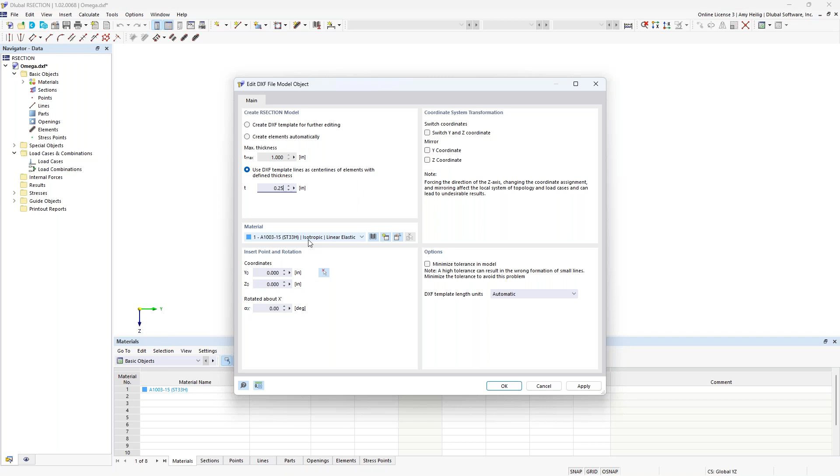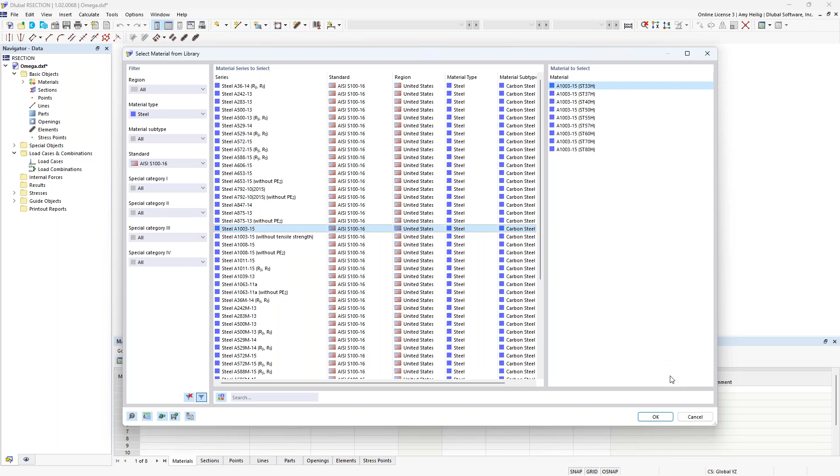We can visit our material library, and over on the left, we have the filters to utilize the steel dropdown and then the AISI S100. So here are all of the available materials for cold-formed steel. And notice that as we click through these different options, there are several subcategories as well. For this particular cross section, we'll go ahead and utilize the A1003-15 and the subcategory here of ST33H. So that material will then be set within this dropdown, and we can go ahead and click OK.

So once the import is done, we actually see everything automatically generated for this custom cross section. Now, I did want to point out that these are completely straight elements. We get a little bit better performance with the finite strip method with cold-formed steel sections when we just model these straight elements directly. It is possible to also model arcs at these corners where the elements join, but just know that the calculation time will be increased because of that. So ideally, it would be best to keep these as straight segments.

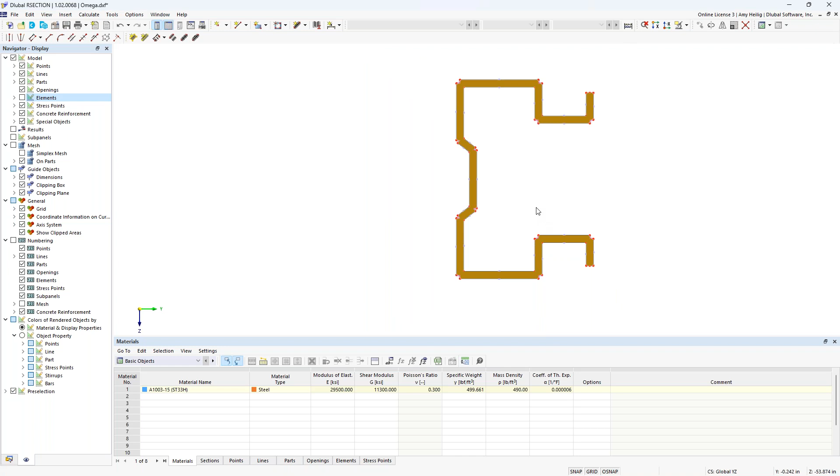Now, looking at the custom cross section here, we have a couple of elements that, again, were automatically generated. We'll start off with what we call the part. And the part is automatically created between the exterior boundary lines here of the cross section. Then on top of that, we have what we call the elements. And each one of these segments here is comprised of an element.

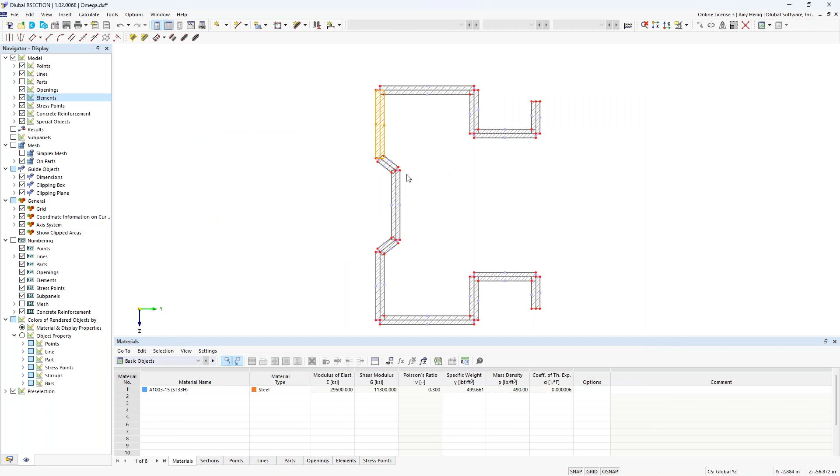We can right click to edit the element. And what you'll see here is that each of these has a particular thickness assigned to it as well as a length. And this information is important for the thin-walled analysis and is required. So we would need both the parts and the elements.

So going back to the navigator here, I'm going to right click on the model name to access the base data. There are two analysis methods. The finite element analysis is set here by default, but this would be more so used for massive cross sections. Instead, we want to modify this to a thin-walled analysis.

Additionally, under the manufacturing type, we can set this to cold form. This will just be helpful once we bring this cross-section into RFEM that this data will already be set. When we click OK, we can simply go to calculate, calculate all, and immediately we'll see here that the cross-section properties are presented to us in table format.

So we have the area, for example, the moment of inertia, the section modulus, and this is the information that needs to be transferred to RFEM in order to understand the cross-section properties here of this section. Additionally, you'll notice the unit stresses are given here based on a 1 kip applied load, for example, for axial forces or maybe a bending moment. We can also view those stresses with the 1 kip per foot applied to this cross-section.

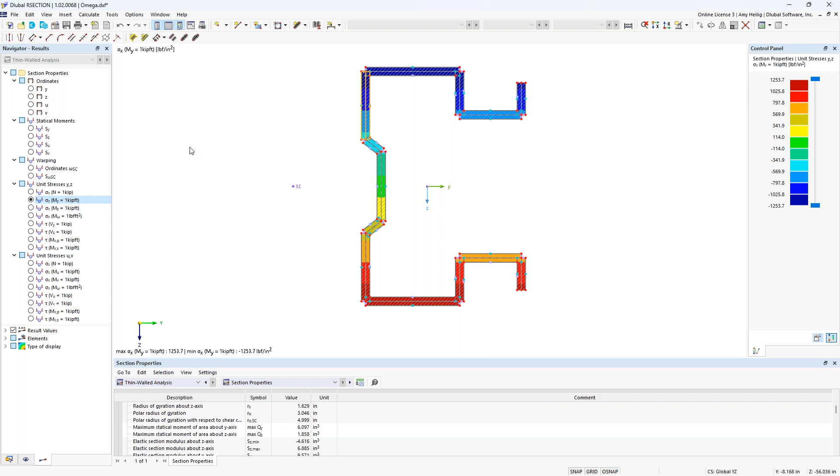So once we have the cross-section properties, we do want to save this to our computer. In order to integrate in RFEM, we do have to have these saved cross-section properties from the calculation as well. And we will jump over to RFEM. So beginning our cold form steel structure today, when we create a new model, we would give it a model name. The type of model would be set to 3D.

And under this second tab, this is where we have our optional add-ons. So RFEM is the base program, and it's responsible for the modeling, the loading. We can integrate with BIM software, and it can run the full static analysis. So this means deformations, internal forces, support reactions. But if we want to take this a step further to actually carry out the design according to the AISI or the CSA S136, then we need to activate here the steel design add-on.

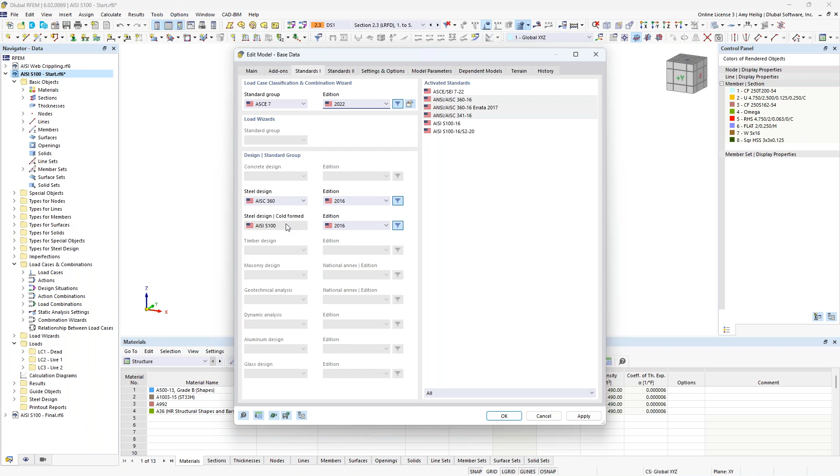Now, under this third tab, this is where we set our standards. So we can see that we will generate our load combinations automatically according to the ASCE 7. We also have here the NBC. We have implemented the latest standard according to the 2022 for those load combinations. Then because the steel design add-on is active, we see here the AISC 360 is set for hot rolled steel, and we have the AISI set for cold form. Now, alternatively, if we were doing design in Canada, we could set this to the CSA S16, and we'll see the cold form update here to the CSA S136.

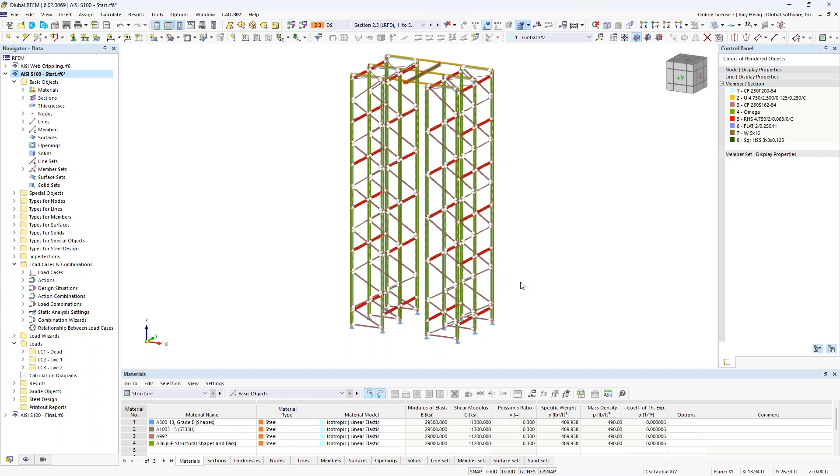So once this information is input, you can see here that for the sake of time, I have gone ahead and modeled our entire structure here. So this is some type of racking system maybe used for automatic storage and retrieval. Now we do have other webinars and tutorials that are dedicated to new users in the program where you can learn how to draw a beam, how to apply supports. So for the sake of time, again, we'll go ahead and just do a quick model review.

So over on the left in the navigator, we have here our various cross sections. So if I edit these cross sections so we can take a closer look, we'll see here the cold form steel sections applied to this particular model. So we have some channel sections, additional channel sections with stiffeners, and that custom cross section here was also brought in from RSECTION.

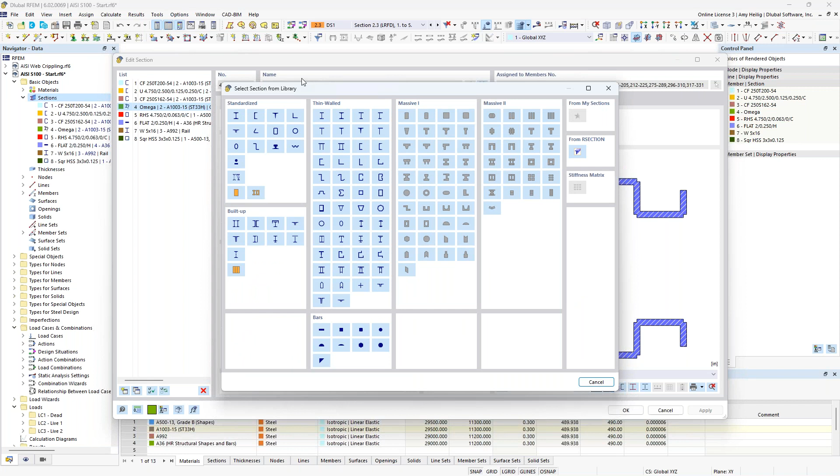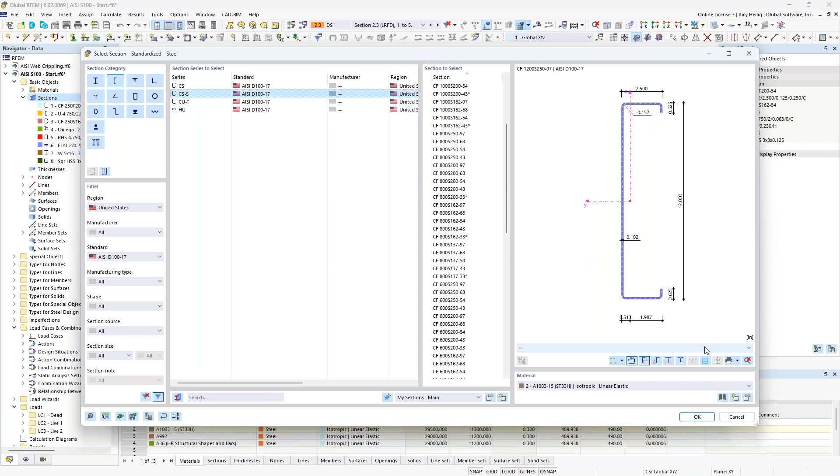When we look at our library database for our cross sections, if you want to choose a standardized section directly from the AISI, for example, if we take a look here at our channels, we'll utilize the filters once again on the left to filter to the United States, as well as the AISI D100, and we see the various channel cross sections, including hat cross sections, available to us here, again, directly from the AISI standard. Now, alternatively, if you have a parametric section that fits within the criteria listed here under thin-walled, you could simply input the dimensions and the custom cross-section properties will be automatically calculated in RFEM directly.

And then alternatively, we have the import here from RSECTION, and that's what we utilized for the shape here in the background. I just navigated, once I clicked this option, to that saved file from RSECTION on my computer, and we can bring this in like we would any other member. So in addition to these cross sections, I have also assigned a material. Similar to our section, we can always visit the material database. Over on the left, we filter to steel, to the AISI, and once again, we have access to all of these various materials directly from the standard.

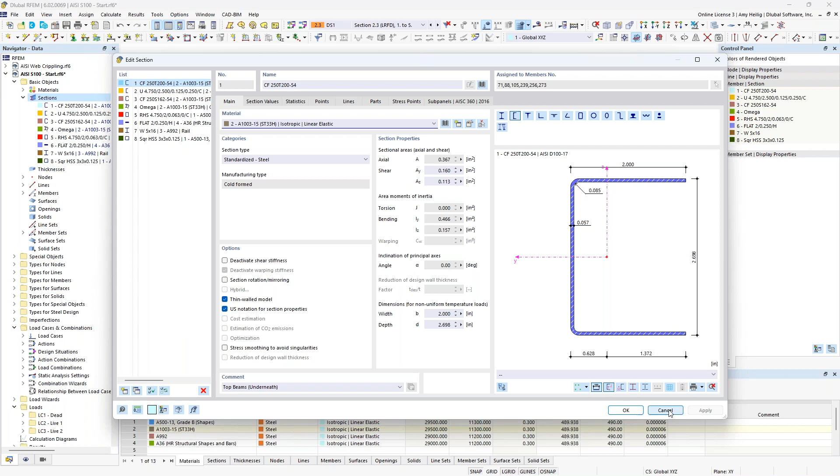So now that we have the cross sections and the materials covered here, we'll also see them within our navigator over on the left. When we take a look at that custom cross-section here for our column, and I'll zoom in, you'll notice that the program has actually rendered this true cross-section for me. And I'll go ahead and create a user-defined visibility here so we can see this in a bit more detail.

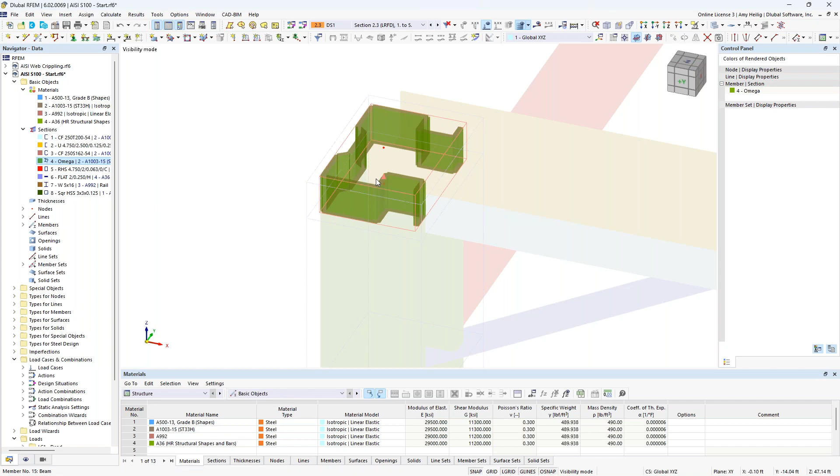So you'll also notice that for these columns, utilizing the custom cross-section, they were actually modeled in segments here. So each one of these is a separate segment. Now, there is possibility in the program to model this as one continuous column and just to keep this as one member and applying intermediate nodes along the length. But alternatively, if we do model this in separate segments, it's entirely possible to create what we call a member set. So we do this by selecting multiple segments.

We can right click, and under the members option, we have here what's called create member set. So that's what you'll notice here over in my navigator, that the program has grouped together these columns. And this will come into play a little bit later on with topics like notional loads, but also the design. Again, wanting to design this as one continuous member rather than those multiple segments.

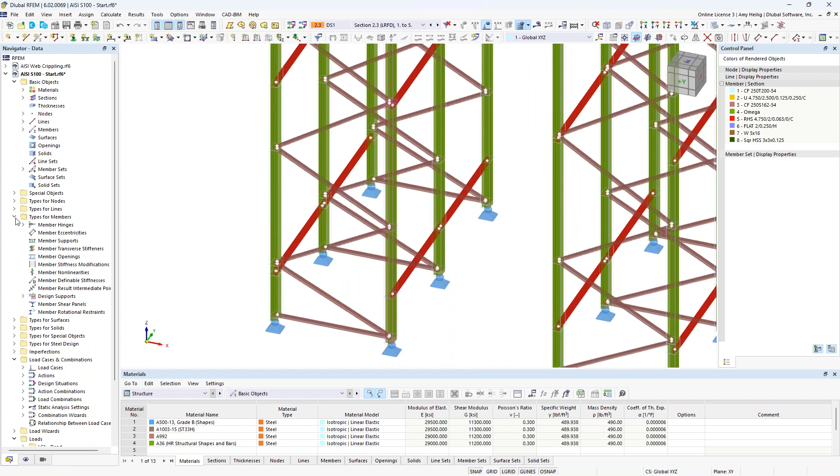You'll also see graphically the member hinges applied with the symbol shown at the member ends. So if we take a look at the types for members, we see here our various member hinges, and the member fixity all depends on how these cross sections or these members are connected to one another. So with cold formed steel, it's quite typical to connect them with screws. And I have several different definitions here, just depending on what that connection is.

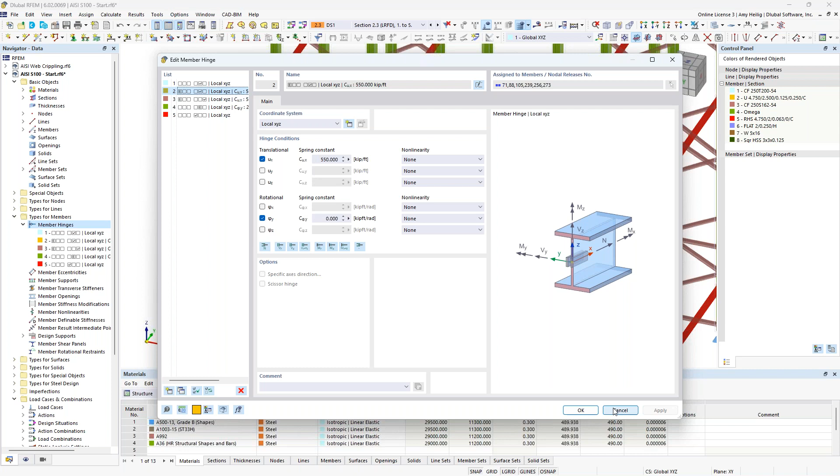So we have our 6 degrees of freedom. These are all based on the local axes of the member itself. You'll notice that for some of these, I've applied a spring constant. So something that's not fully fixed, not fully released, but somewhere in between. So within this model, we can take a look at the different hinges applied. They're probably a little difficult for you guys to see, but as I click through these, they are highlighted in the model depending on which member they are applied to.

And finally, we have our nodal supports down here at the bottom, which were applied just utilizing the tool up here in our toolbar. And these are also a bit special in the sense that initially they just look like standard pin connections, which you'll see under this definition type that we again have 6 degrees of freedom, but these are based on the global axes here, shown here in the background.

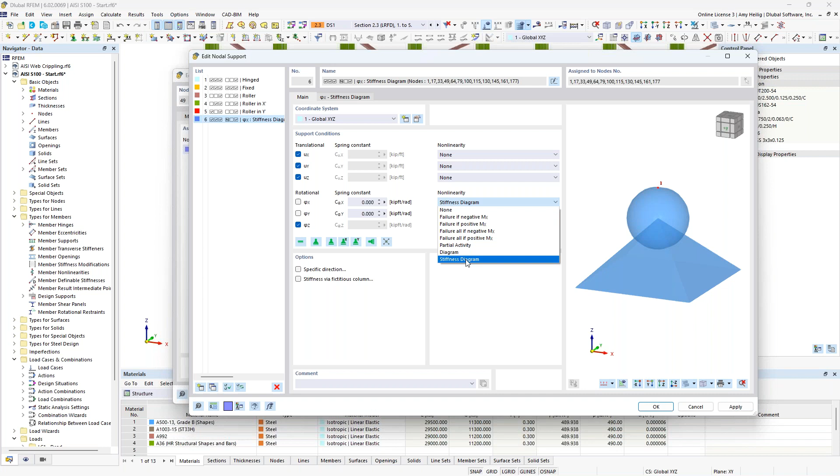So I've restrained the translation for this pin support, including the rotation about the global z-axis, but I've also applied a rotational nonlinearity. So this is within the rotation about the global x-axis, and under the nonlinearity options, I've applied a stiffness diagram. And we now get a new tab here where we can define this information. So you'll notice that I've set this so that the rotational stiffness is dependent on the contact pressure or the downward force for these nodal supports.

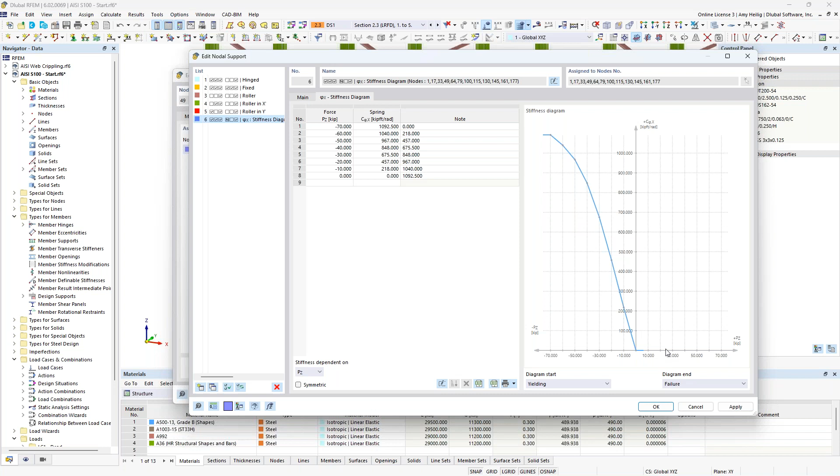So as the contact force increases here, we'll see a greater spring constant, and then in uplift, we'll see that support fully fail for rotation about the global x-axis. So it's entirely possible here to consider more complex scenarios for our nodal supports as well. So now that we have a basic understanding of the various members within the model as well as our supports, let us move on to loading.

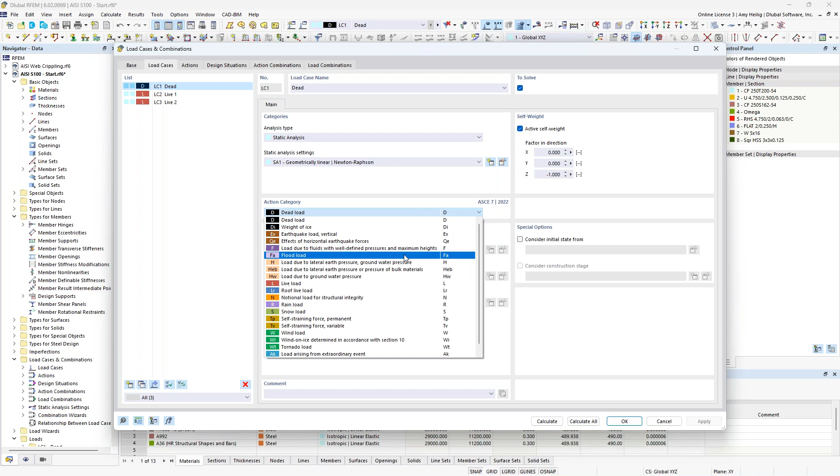So I have here 3 simple load cases that we can access in our load cases and combinations dialog box. So we have the first load case, which is dead load, and you'll notice that self weight is active here, and the action category is also set, which is just dependent on the ASCE 7, because remember back in the base data, this is the standard we're using to generate our load combinations. We can revisit that information here under our base tab, where we'll see the availability to change that standard if we'd like.

The second load case is a live load. So action category set to live, self weight is turned off here. And finally, another simple load case, live load 2 with the action category set to live. So once these load cases are set up, we would need to actually apply the loads to the structure. So we'll begin here with the display of our dead load. So you'll see that I actually didn't apply any additional loads to this load case. We're only accounting for self-weight automatically under the hood for that particular load case.

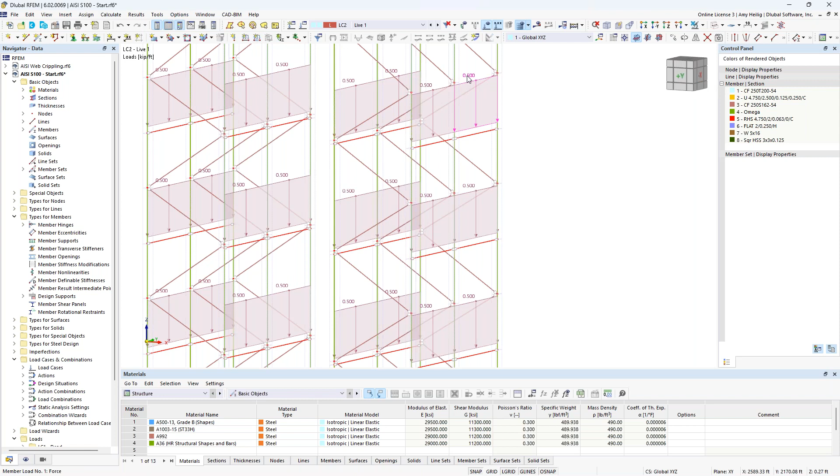Now looking at our live load 1, we see here, and I'll turn this into wireframe view, that we have the member load applied here at our beams, which are spanning between the columns. And a member load can be applied up here in the toolbar. But there is something a bit special about this particular member load. If I double click on it here, we'll see that it's just a standard downward uniform load of -0.5 kips per foot, but we have the ability to consider an eccentricity on the loading.

So when I turn this checkbox on, I get the additional tab up here at the top. Now the default behavior for a load is typically applied at the center of gravity or possibly the shear center. But alternatively, we can move that load application up here to the top center point so that perhaps we want to account for some additional torsion within the member for the design, or we can do so directly within the force eccentricity.

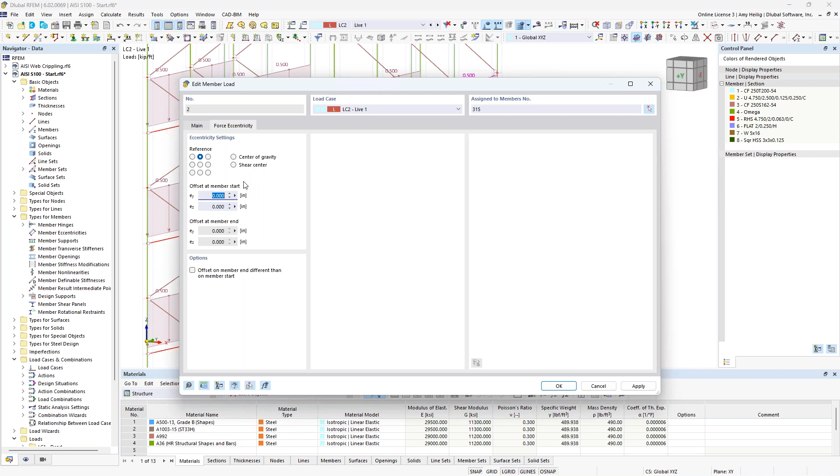So in addition to this first live load, we also have this second live load, and this is also a very simple application with a single nodal load applied up here to our center beam. So this load is just essentially introducing those horizontal forces to the entire racking structure. That nodal load can also be applied up here in our toolbar.

So going back to our load cases and combinations, now that we've generated those load cases, let's take a look at the design situations. So the program has automatically created 2 design situations for us, our LRFD design situation and ASD design situation. Again, these come directly from the ASCE 7, and it's nothing more than just grouping together our factored load combinations for the first design situation and our unfactored load combinations for the second design situation.

We can always click on this little info button here, which will pull that information directly from the standard of what we're referencing. Design situations are absolutely needed when it comes to carrying out the design within the steel design add-on that we activated. So that's why you'll notice that these are by default checked on here for that particular add-on.

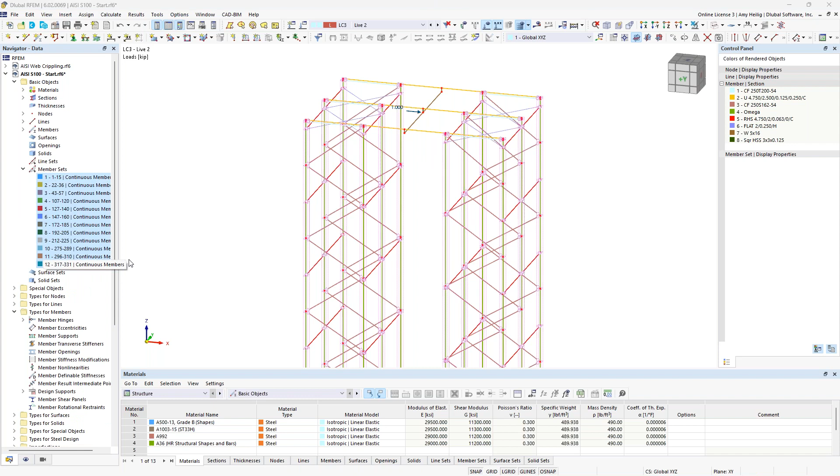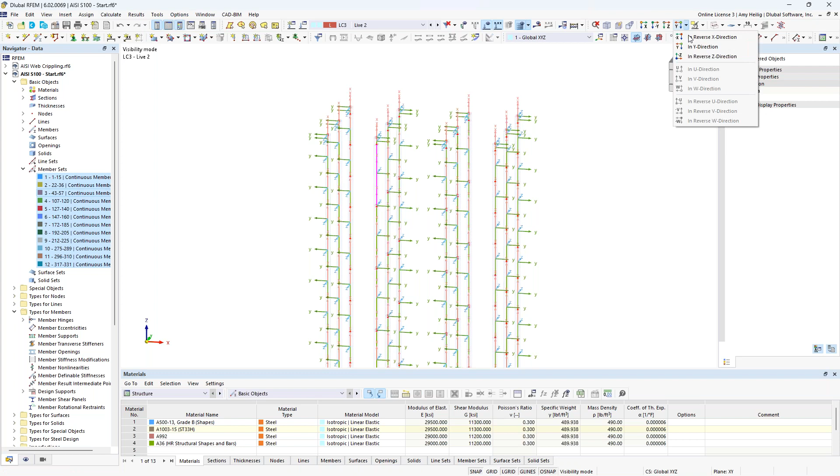So I'll begin by creating a user-defined view here for only my member sets. So we'll go up here to our toolbar and create that user-defined view. I'll go ahead and turn off the hidden objects in the background. Now, additionally, when we create our imperfections or our notional loads, these do depend on the local axis system. So if I right click, I can turn on the local axis system of all of these columns. So we'll take a look at the elevation view here.

Now, the imperfections are going to be available under our navigator here under the imperfections table. So we right click to create a new imperfection case. Now, again, the imperfection directions or the case all depends on which direction you want to apply them in your model.

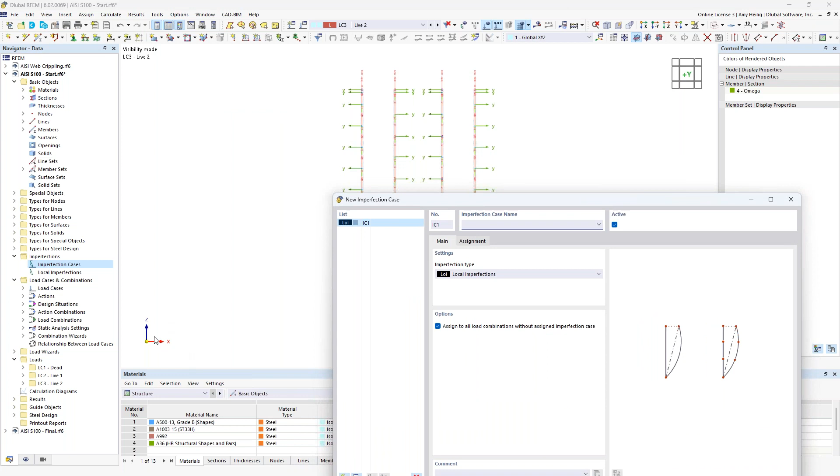For our case today, I'm going to create two simple imperfection cases, one in the global positive X direction and one in the global positive Y direction, or into the page here. Therefore, I need two imperfection cases. So we'll begin with imperfection in the X, and then I simply make a copy of this and I'll create my second case, imperfection in the Y.

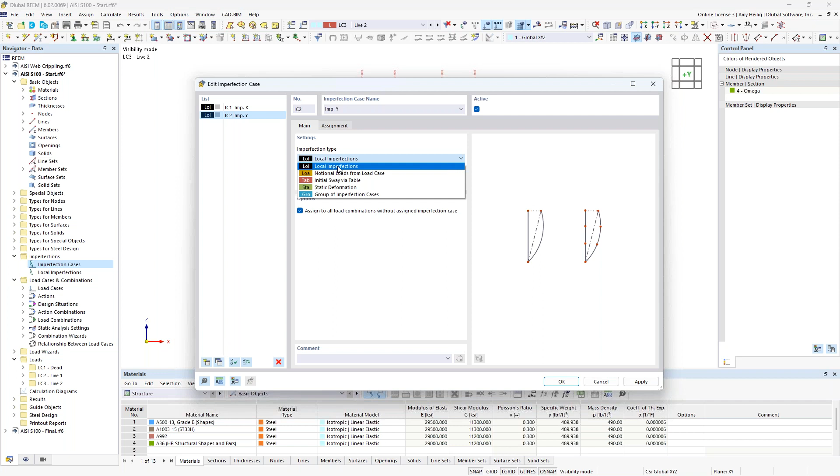Now, the imperfection type within this dropdown will be set to local imperfection. And under the assignment tab, there is the ability to assign specific imperfections or notional loads to specific load cases. Alternatively, though, we can just apply it to all of our load combinations, which is what we'll be doing today. So now that these imperfection cases are generated, we need to actually apply the notional loads to the structure. So now you'll see here under our imperfections folder these two imperfection cases.

So more or less, we are just applying a deflection here at the top of our columns, but the deflection magnitude all depends on the axial force applied to the member. So this is an iterative calculation that the program will automatically apply for us based on the axial forces under each load combination. The imperfection is applied according to the member's local axes.

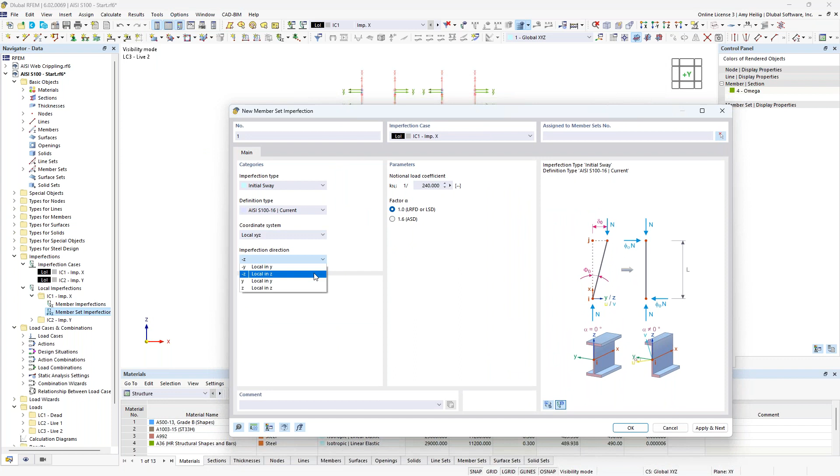So for our case today, this first imperfection in the X direction, we want to apply this based on the negative Y axes. And I'm going to select here my member sets in the first row and the third row. And we might be wondering, why are the local axes different here for the different member sets? That's because in rows 1 and 3, I have the members rotated at 90 degrees, and at rows 2 and 4, they're rotated at negative 90 degrees. So inevitably, this affects our local axes orientation, which is why we need to take a two-step approach here for the imperfection direction.

So now that I've applied it to those particular member sets, I can click Apply and Next to remain within this dialog box and simply modify my imperfection direction to the positive Y local axes. I'll select these graphically as rows 2 and 4. I click OK, and I click OK once again. Now, if we display our notional loads, or imperfections, we see that column out of plumbness applied, again referencing the AISI, to our member sets or our columns directly.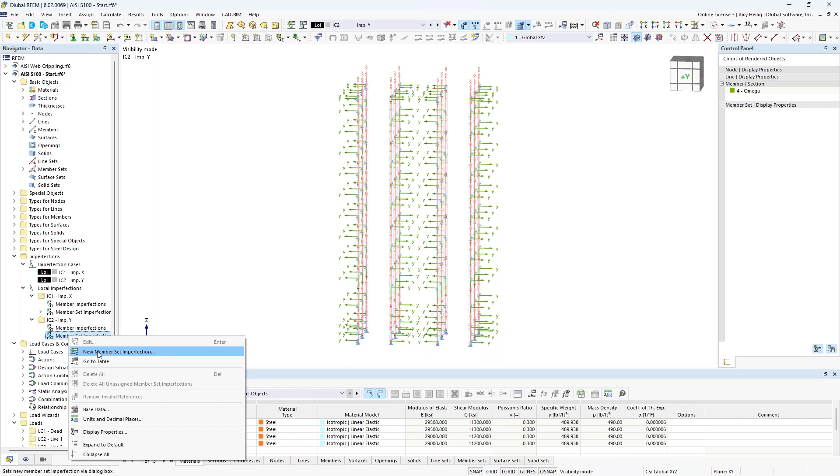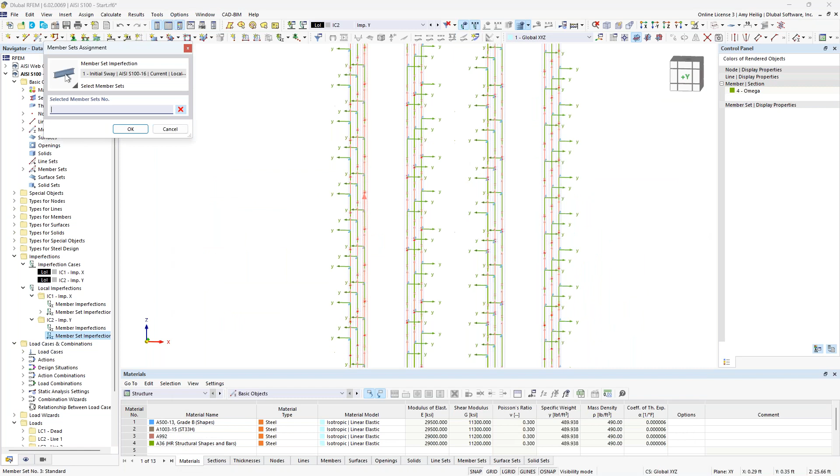We're going to do the exact same approach for our members for imperfections in the Y direction. So we go back to our navigator to right click to create a new member set imperfection, this time under the imperfection Y case. We'll select the definition type directly as the AISI S100 once again. The imperfection direction this time is going to be in the negative z-axis, and I will zoom in here to select the member sets in the first row and the third row. I click OK, apply and next, and then we simply modify this to the positive local z-axis to select our member sets in rows 2 and 4.

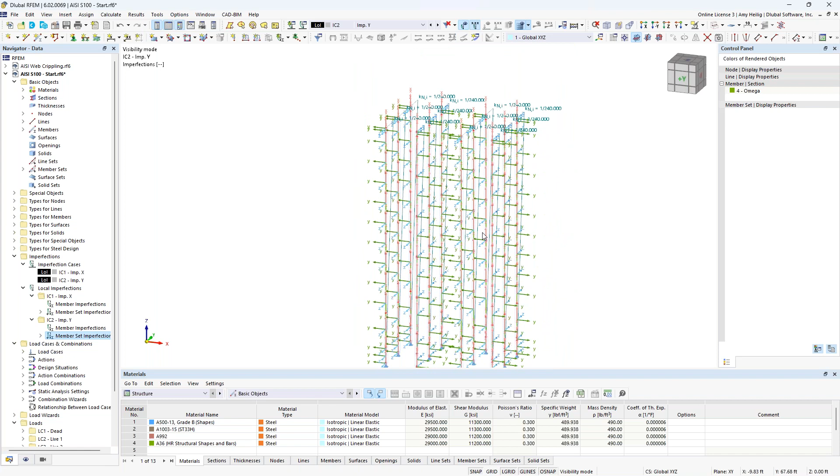I click OK through these dialog boxes, and now we should see this column out of plumbness, and I'll right click here to turn off the local axis system, applied in the global Y direction. So this is how we can directly account for those imperfections based on the code requirements. Now that we have applied the imperfections in these various cases, we need to combine them into the actual load combinations.

So I'll drop down here to my dead load, and this will allow me to access the load cases and combinations dialog box. And under the design situation where we had previously set the second order analysis, you'll notice that we have a checkbox to consider the imperfection cases that is automatically turned on by default. So therefore, for my factored load combinations, those imperfections will automatically be added in to the existing load cases as well. Now, the problem is that I want to carry out LRFD design today for my cold formed steel structure, but I'm using my ASD design situation for maybe my serviceability or deflection checks.

Therefore, I don't want to consider my imperfections for this second design situation. Well, it's easy enough to create a copy of this existing definition type. And within this copy, I just simply turn off the imperfection cases. So now going back into my main dialog box for my factored load combinations, we'll keep this as definition number 1. But for my unfactored load combinations, we're going to drop down and select the third option here where we

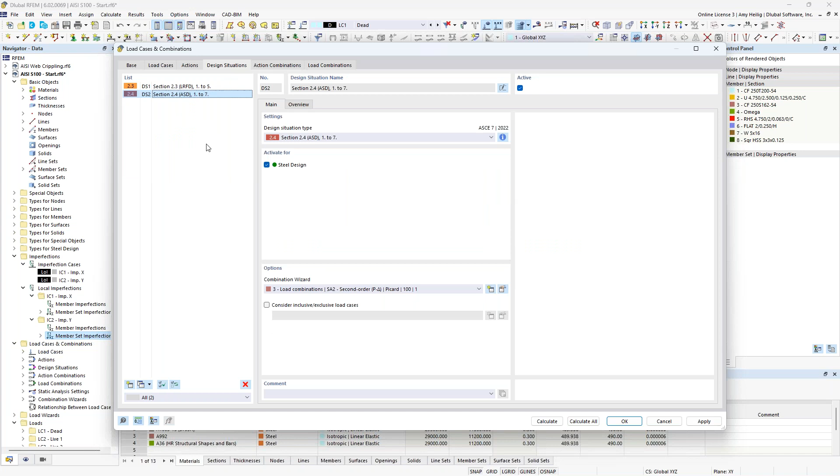The final topic, according to the direct analysis method, is stiffness reduction, and this is given in section C1.1.1.3. We reduce this stiffness to account for inelasticity effects as well as cross-section deformations. So in order to take into consideration the stiffness reduction, we are once again going to go in here to our combination wizard settings. And this option is actually controlled directly here with a new structure modification.

So we create a new definition type, and we're going to be applying this to our members. When we turn this on, we get an additional tab here, where under the member modification, we can use our dropdown to create a new member stiffness modification. Now, very similar to what we saw with our imperfections or our notional loads, we also have the AISI S100 available in this dropdown. So this will reference the code directly and the particular equations given here to iteratively calculate this tau sub B factor that will be applied to the flexural stiffness for each member.

And again, this is very similar to what we see within the AISC. Now we also have an additional factor here of 0.9 that's applied to both the flexural and the axial stiffness. Now the difference here from the AISC is that within the AISI, this is 0.9, but within the hot rolled steel standard, this is 0.8. So that is one difference that you'll see here.

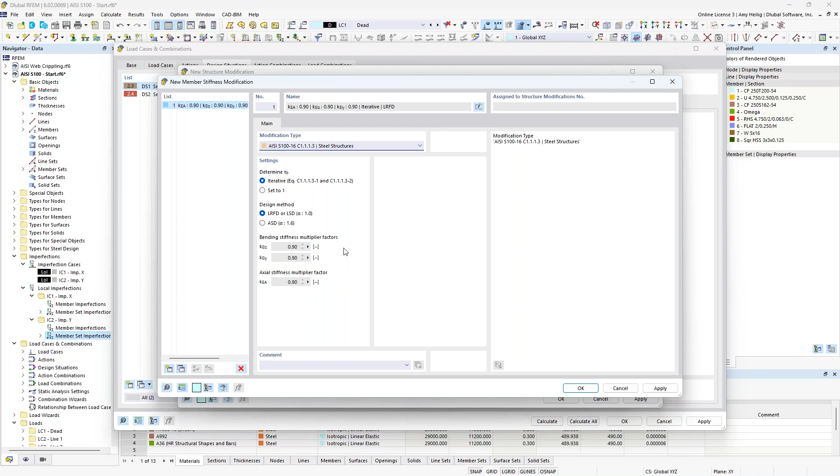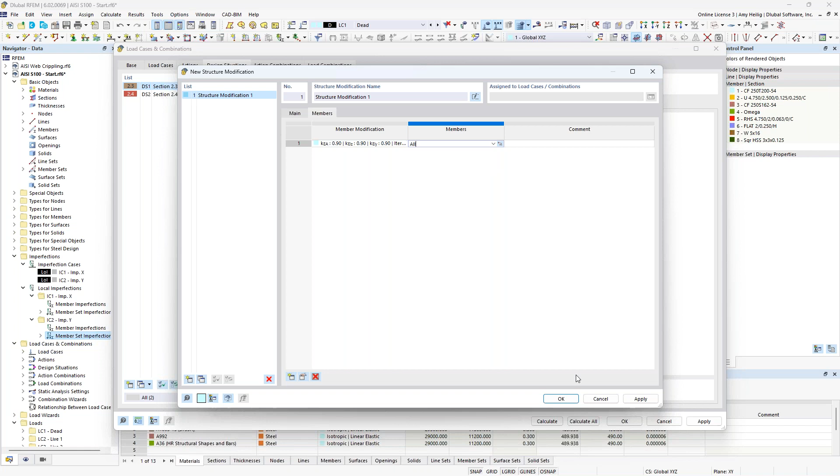Now, the code says to apply this stiffness reduction, once we have defined this, to all members that contribute to the lateral stability. So we certainly could use this option here to graphically select those members, or we could input the member numbers. Now, alternatively, we can just apply the stiffness reduction to all members. The code goes on to tell us that this is also possible. So if we use our drop-down box for all, we'll now apply those stiffness reductions to all cold formed steel

members within this model. But yet again, I only want to consider this for my strength design, which will be carried out with this LRFD design situation. For my unfactored load combinations, I do not want to reduce the stiffness, so I simply leave this unchecked here. So once again, we'll go back to the load combinations to check this out in more detail. And sure enough, for each factored load combination, we see the additional setting here to reduce the stiffness. But if we jump down to our unfactored load combinations, this option is turned off.

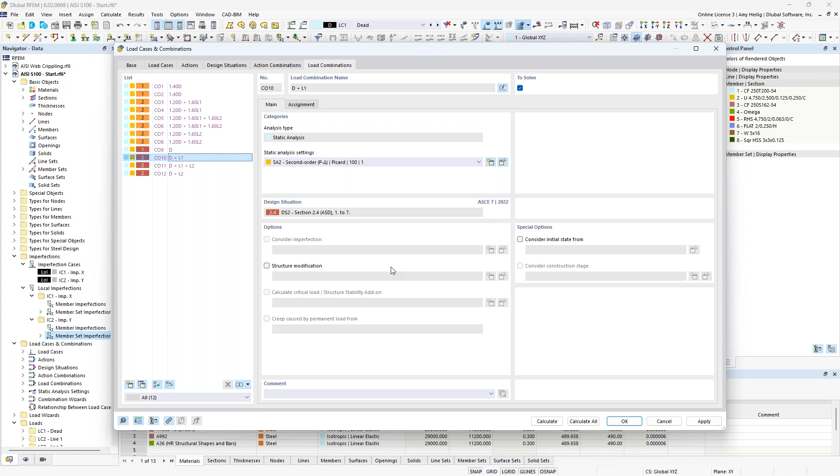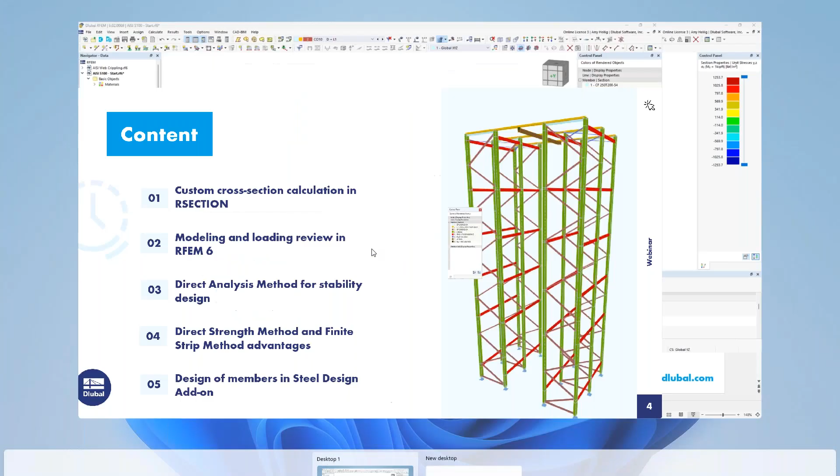Okay, so now that we have fulfilled the direct analysis method requirements, we're technically ready to run the full analysis. But the huge benefit of RFEM 6 is this better integration of these add-ons for the design within the main program. So we'll go ahead and continue on with some of the design input information specific to the AISI to carry out that workflow. For this, I'm going to go back to the PowerPoint here because I do want to talk in a bit more detail about the member buckling behavior. Very important topic when we're talking about these very thin-walled cross sections.

So we know that there are failure buckling modes that are typically caused by compressive stresses on our members. And this is usually seen when we have a bending moment or an axial force. Well, when we're talking about cold formed steel, there are 3 buckling modes that we typically consider. The first is going to be local buckling. So this is essentially where the elements bend with no translation at fold lines.

Now, additionally, we also have global buckling to consider, and this is lateral bending of the entire member, and we typically think of this with flexural torsional, or lateral torsional buckling. Now for this, we'll see one long half wavelength, which is always dependent on the unbraced lengths for these particular buckling modes.

And finally, a bit more unique to cold form steel is distortional buckling. So this is more or less a combination of local and global failures, where we have some translation at the fold lines, but also the half wavelength is somewhere between what we see for local versus global.

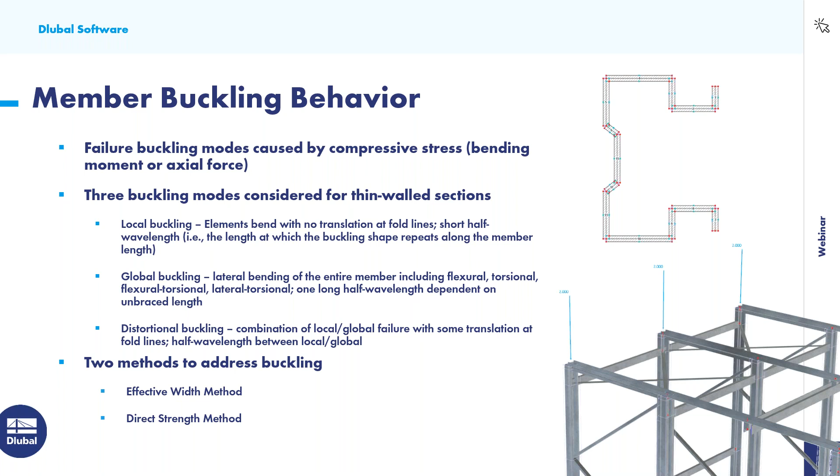Now, there are 2 methods throughout the AISI to address buckling. The first is the effective width method, and the second is the direct strength method. So going to our next slide here, let us talk a little bit more about the effective width method versus the direct strength method, and maybe some advantages here that we have.

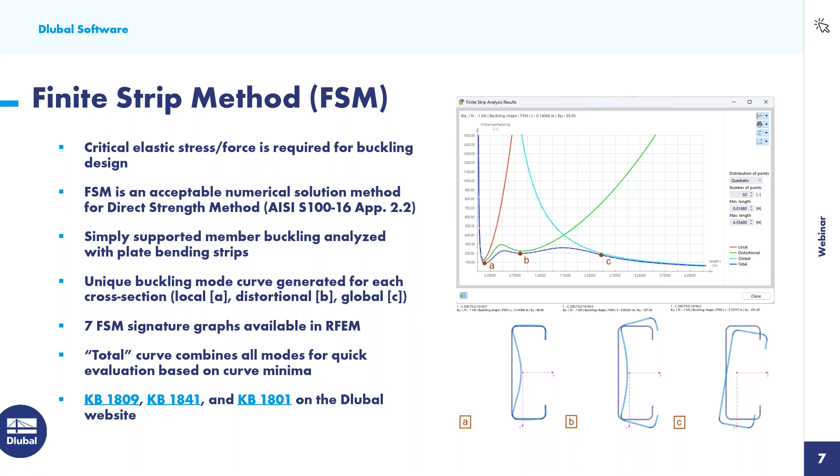Okay, so what we will do now is to go back to the RFEM model, and I'm going to revisit the cross sections here. So looking at the various cross sections, we'll immediately jump down to that custom cross section Omega section in particular. If we use our drop down over on the right, here are those 7 unique graphs that I just mentioned for the finite strip method. And these are all based on the applied unit load.

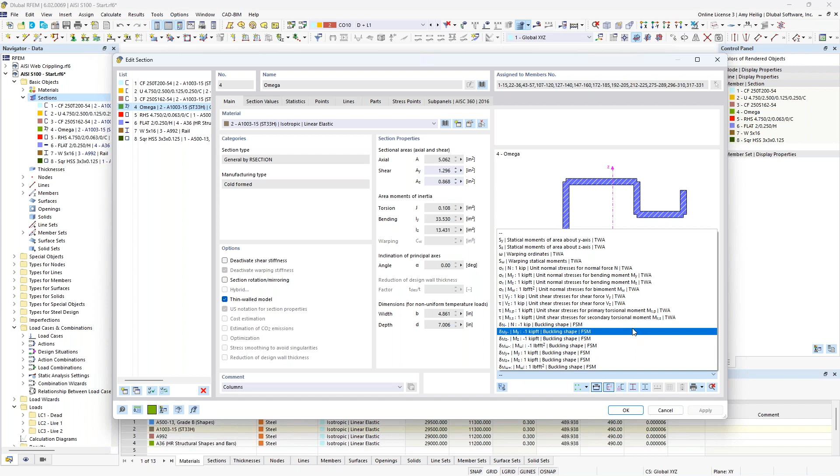So if we take a look at 1 kip axial force, what we will see is that finite strip method plot, again, referencing that PowerPoint. And this currently is showing the total curve. But additionally, what we can do here is to plot the local curve by selecting it within this dropdown. And we see that appear over here on the left-hand side with the red curve. We can also display the distortional curve. And finally, we can display the global curve.

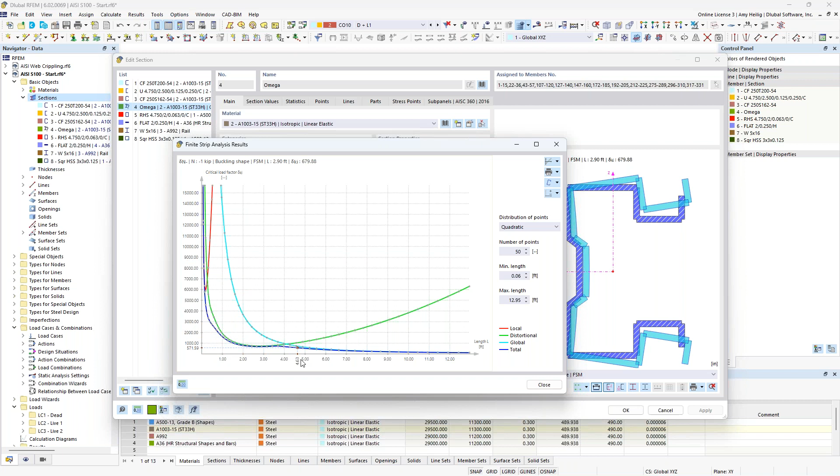And ultimately, that total curve is going to consider all 3 of these, again, for just a quick evaluation here based on the curve minima along the length. So this is what's happening underneath the hood for every single cross section, even if it's a custom cross section. So now that we have a better understanding of the direct strength method and finite strip method, we'll go ahead and take a look at global buckling now in a bit more detail with effective length definition.

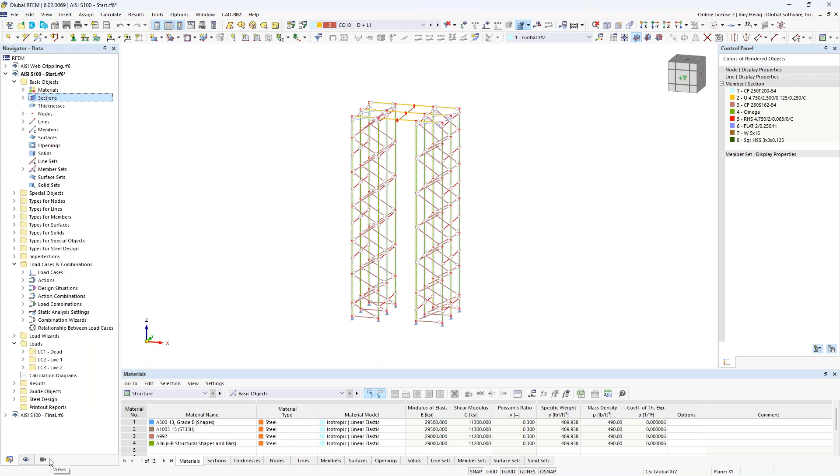So when we design our members, we need to input information such as unbraced lengths. We'll begin here with activating only my rectangular HSS section. So let me go ahead and show the rendered view of this so you can understand exactly where these cross sections are. So these rectangular sections are spanning in between my columns. And we'll begin with the effective length definition for these particular members.

So we highlight them all, we double click, and what you'll notice is that the design properties here is turned off. This is telling the program that I'm not interested in carrying out the actual design according to AISI. Rather, I only want to carry out the analysis. When we turn on the design properties, this is going to reference the Steel Design add-on, and we get additional tabs here up at the top. So this is all information that is specific only for the design.

Under the design types, we have here the effective length definition. So let us go ahead and access a new effective length definition. And you'll see here I can modify my view within this dialog box so we can see those HSS members spanning between the columns. We immediately want to change this to the effective length definition according to AISI S100 for these rectangular hollow sections.

Then you'll notice that for global buckling, we have here 4 considerations: flexural buckling, strong and weak axis, torsional buckling, and lateral torsional buckling. We also have the ability here to determine the elastic critical stress according to the finite strip method or according to chapter E2 and F2.1. So this is a really important topic. So I'm going to jump back again to the PowerPoint here to explain in a little bit more detail.

So you'll notice within this dialog box, as I just showed you, that we have 2 options here to determine the elastic critical stress. The first option being the finite strip method or the numerical method. And this is going to be applied for local, distortional, and global elastic buckling failures. But it should be known that if we do choose the finite strip method, flexural and torsional stability failure modes are always grouped together for the global buckling. And this is regardless if we uncheck one of these options.

So if I am thinking, okay, my member is fully restrained against torsional buckling, but I'm still concerned with flexural buckling, so I fully uncheck this option, the program doesn't care. It still sees these grouped together because we're referencing the finite strip method graph. So this is purely a limitation of how these graphs are created, that flexural and torsional buckling are always grouped together.

Now, alternatively, if we leave these checked, but we have varying effective lengths or unbraced lengths for flexural versus torsional, because these are grouped together, we are always going to take the longest effective length. So if we would like to set a smaller length for torsional buckling versus flexural, the program just groups them together for those particular global stability checks and will reference the longest effective length. So just keep that in mind with the finite strip method with the global buckling.

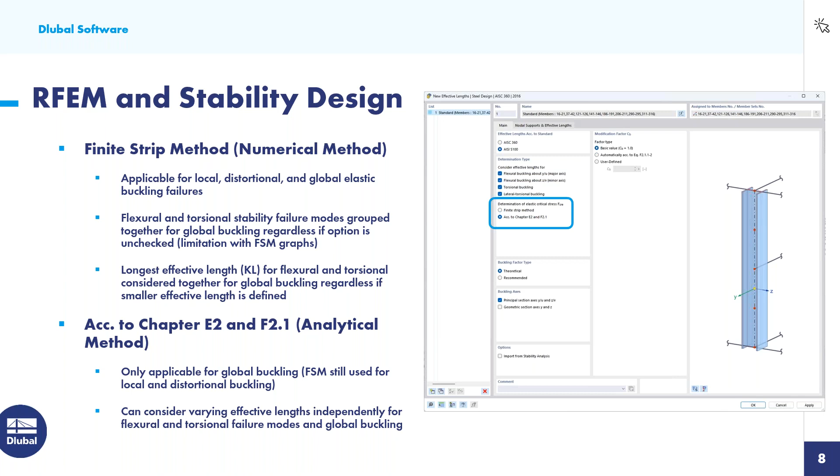Okay, so now that we have a better understanding here of what these various settings are, for my particular example today, when we have something like a tube section, we're really not interested in torsional buckling or lateral torsional buckling. And because I'm unchecking this, I'm going to utilize the analytical method here, because remember, the finite strip method would not detect the torsional buckling being unchecked. The program would give you a small warning, just letting you know that, hey, we see that you unchecked one, but we really can't consider it. So we'll utilize the analytical method.

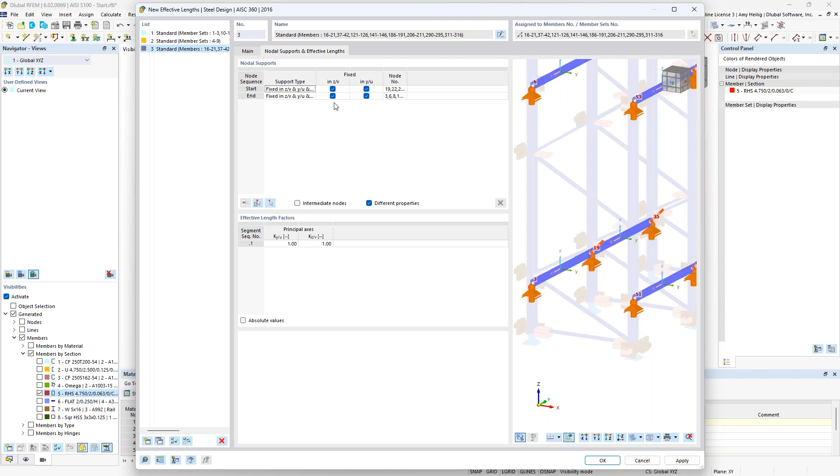Under this second tab, this is where we apply our intermediate supports, and you can see the program automatically will apply these at the member ends, and we will be fixed for flexural buckling in the strong axis as well as the weak axis. So that effective length, KL, will automatically be calculated for all of these members shown here.

So once we are done with the effective length input, we also have the ability to apply a local section reduction. Just keep this in mind that this is only for the tension design according to the AISI. We do not carry out any equations at this point in time for cold formed steel considering holes. So everything is considered without holes.

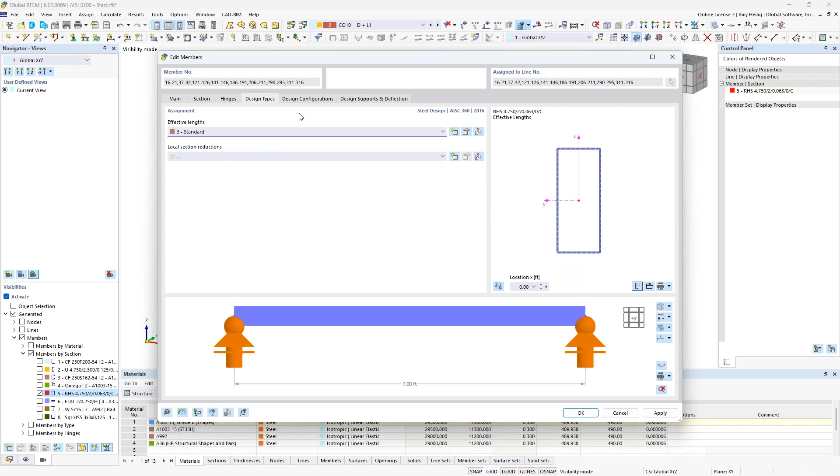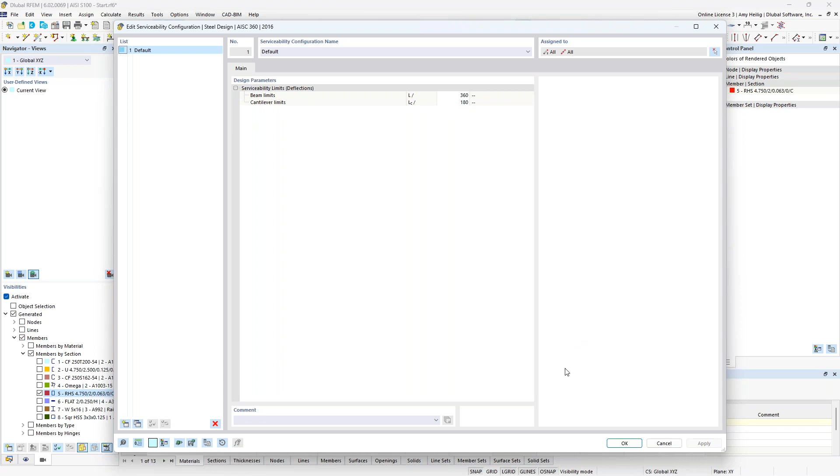Under the design configuration, we have here our strength configuration. So we take a look at the default settings here, just some various settings that we have put in the code references directly for alternative equations. So you could certainly take a look at here and make those modifications if you'd like. Under serviceability, this is just simply where we set our limiting deflection ratio for our deflection checks. So for simply supported members, we will reference this L/360, and for cantilevers, we'll reference L/180, but of course you can make modifications to this design ratio here.

And finally, we have the design supports and deflection. If I do absolutely nothing within this dialog box, the program automatically assumes that it's supported at either end. Therefore, we're going to reference the L/360 limiting deflection ratio. For our case today, we'll go ahead and leave this as default and not make any further modifications here. So now that this information is complete for these rectangular sections, I'll go ahead and cancel out my visibility here.

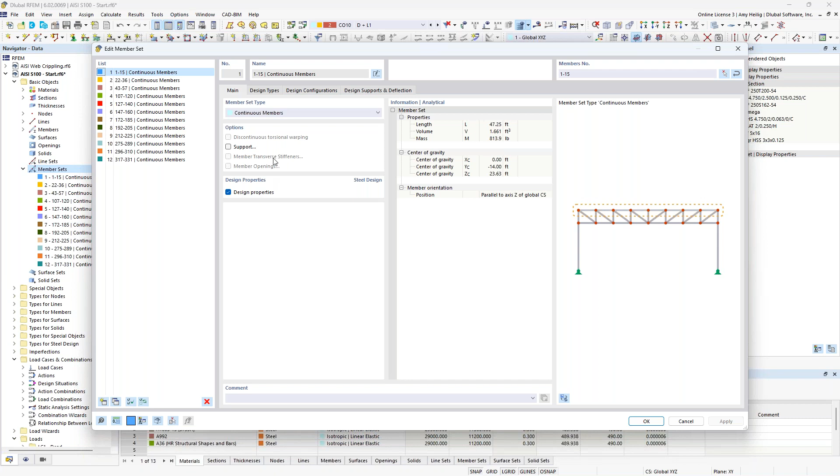I also have carried out the same workflow for my member sets. So remember, I want to design these columns as one continuous member. So rather than going into the individual member settings, we can come in here to our member sets. And what you'll notice within this dialog box is that this also has a design properties checkbox. So when this is turned on, we have some additional settings up here at the top within these tabs that look identical to what we just covered.

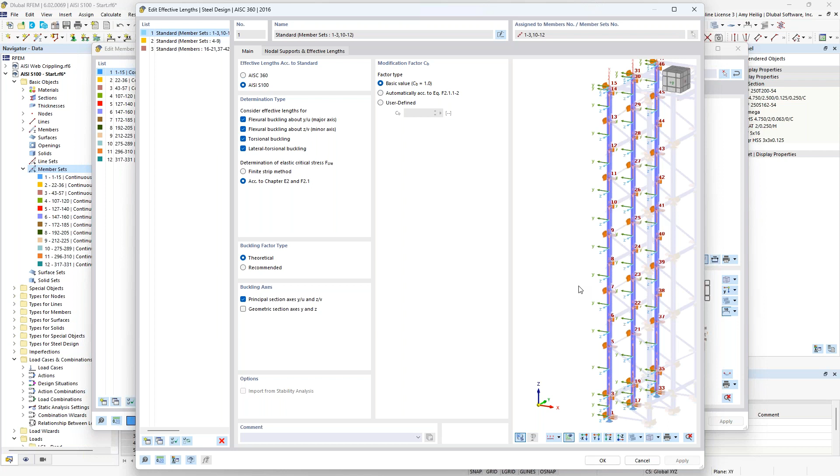Now, because this column is certainly much more complex, I went ahead and defined the effective length already here. So you can see that I have flexural, torsional, lateral torsional buckling all considered. I'll go ahead and change around my view here so we can see exactly which members we are looking at. I am referencing the analytical method here because I have some different unbraced lengths for torsional buckling versus flexural buckling.

Now we have the ability to detect these intermediate nodes along the entire length, and notice that there are 4 degrees of freedom. This just all affects the effective length definition here for flexural buckling in the strong axis, flexural buckling in the weak axis, torsional buckling, and lateral torsional buckling. So depending on our particular connection and what members are framing in here, we can set these accordingly.

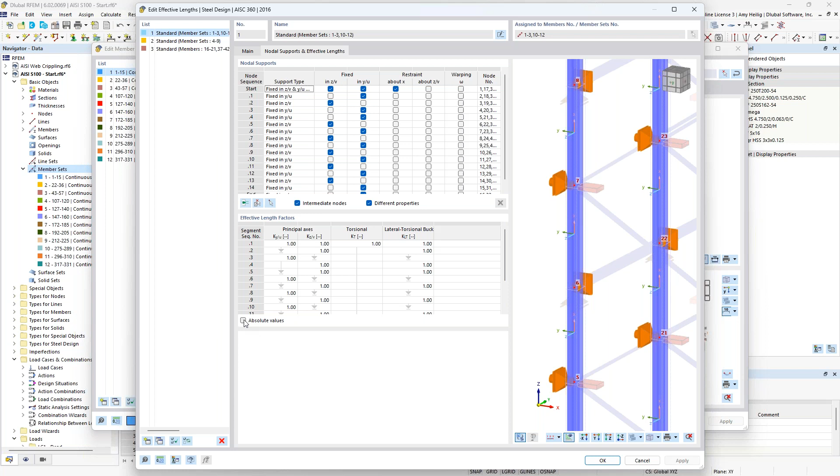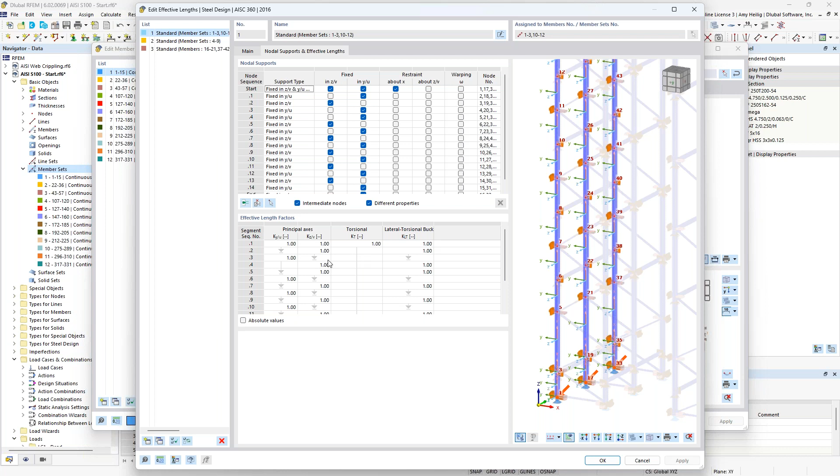And alternatively, if you have absolutely no interest in inserting in all of these intermediate supports, you can check on the absolute values here and directly input KL for each of these failure modes. And the downside to this is that if the model has any changes, maybe nodal location, we modify these slightly. If we use these options up at the top, everything will be automatically updated for our unbraced lengths. Alternatively, if we override these, we would need to come in and manually modify them, but that's certainly an option that you can take advantage of.

Also, under the design supports and deflection, you can see here that I have assigned specific design supports depending if the member is supported in the strong or weak axis direction. And these are applied all along the member length because I really don't want to reference the full column height for my limiting deflection ratio, but rather I want to reference the L, or the length in between these intermediate supports. And we do so with the design supports. And notice that all of these intermediate nodes were directly detected within the program.

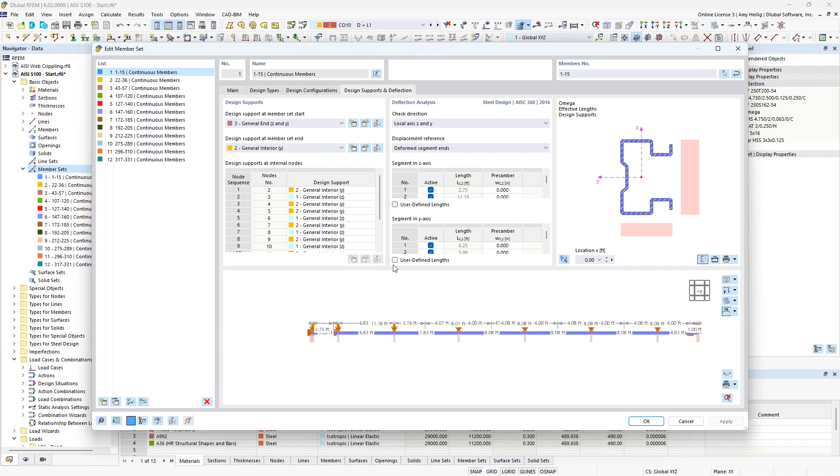Okay, so now that we have this information defined, such as unbraced lengths, we'll go ahead and exit out back to the program. And we want to jump down here to the steel design add-on. And you'll notice under this first tab, we have our design situation. So I had mentioned that if we carry out the design, we have to use these design situations. And the reason why is we see our first LRFD design situation that we are going to relate in the second drop down here to the strength limit state according to LRFD design. I'm using my second design situation, ASD, and I'm relating this to serviceability.

Now, alternatively, if we were carrying out ASD design, then maybe we would turn off altogether LRFD. We would set our strength limit state according to ASD for our ASD design situation. We can make an additional copy of this design situation for serviceability as well, or we could create our own custom design situation for serviceability. Again, for our example today, we'll go ahead and carry out LRFD design.

Under the second tab are the objects to design. Now you'll notice that defaults to designing all members and all member sets, but we have many members that are given to us over here in this column in red, and that's because they don't have an effective length defined. So the program won't be able to design them, of course. So rather than designing all members, let us go ahead and graphically select here by clearing out this entry, and I'll turn on only my HSS sections so that I can graphically select these. The member numbers are automatically input here. And now we're ready to carry out the design for this simple example only for my rectangular sections, but also for all of those member sets or each of those columns.

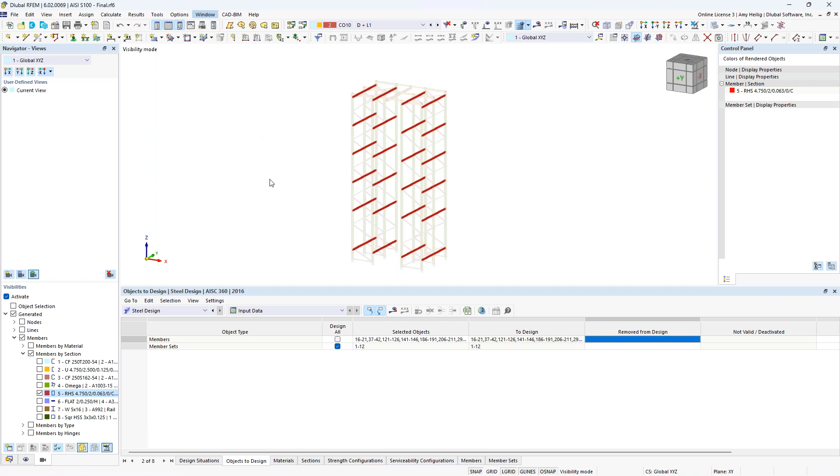So we go to calculate all. Now, because of the finite strip method, remember for all of these individual cross sections, the calculation time does take a few minutes. So rather than waiting for that, we will jump to an already saved model here with our results. So once the calculation is done, we are currently looking at the steel design add-on, but we now have available to us the design ratios on the members. And we could view these design ratios in the table format here for each individual member. And you'll notice that as I click within this table, the program will automatically sync here in the graphical view to show me exactly which particular member I'm looking at. That red arrow is showing me for that particular check exactly what's controlling.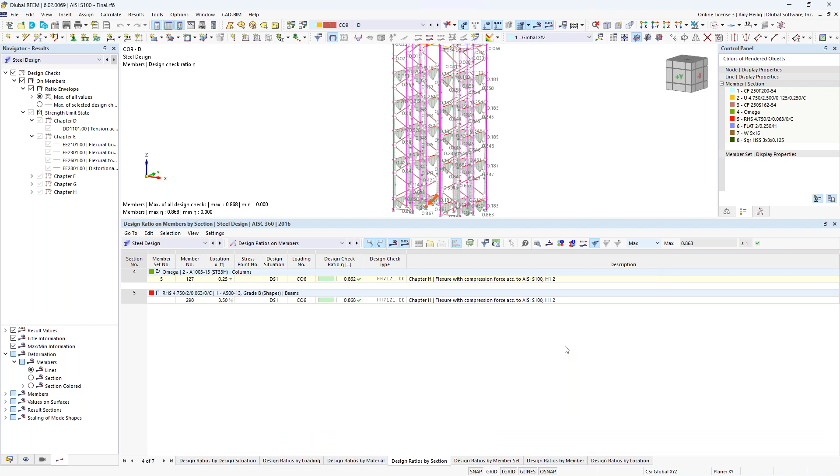But maybe we look at the design ratios by the cross section because I've only designed 2 cross sections for today. We have here our custom cross section from our section that we brought into the program, as well as our rectangular hollow section here. And you'll notice that we are checking every single chapter here for our strength design, as well as serviceability, referencing each chapter. Now, if you're only interested in the max design ratio, we could always use our filter here to select the max. And now we see just the controlling design ratio for this particular cross section.

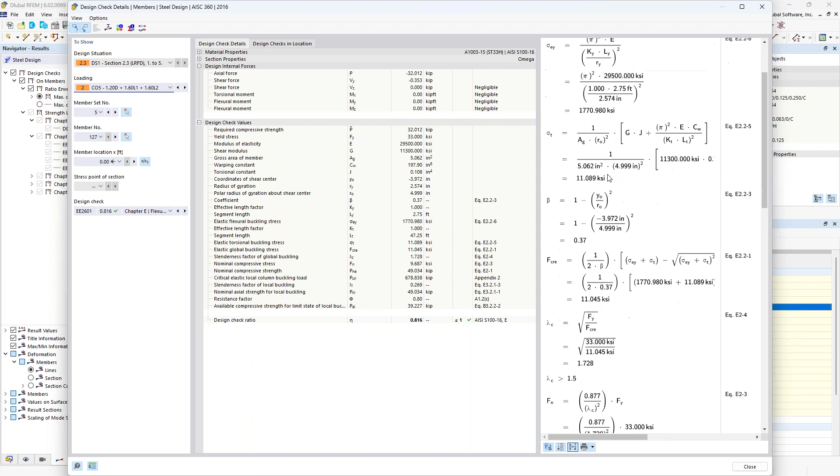And for these individual checks for each chapter, we can access what we call the design check details. So this is new within RFEM 6, that for all of these code calculations, you'll notice here that we list the formulas line by line. We have all references to the AISI standard, and we have all the variables also listed out here, and ultimately how we are calculating this design ratio. So trying to be as transparent with this information as possible so that you can follow along with your own hand calculations to ensure that you agree with the program's output.

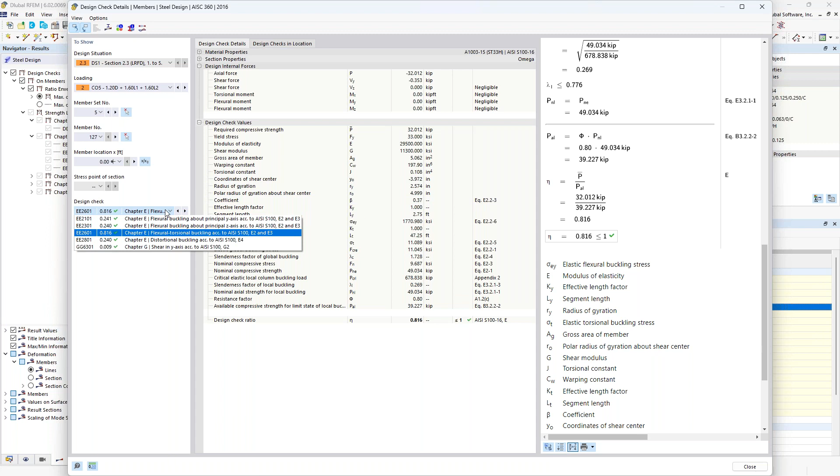We can print this to our printout report. What's nice is that if we do this and we make any model changes, we rerun the design, the picture of these calculations will automatically update as well. We can jump down to any different particular check here to view the various formulas for chapter E, for example. Also within this dialog box, we can access what's called the diagram in section.

So under my drop-down box, we see our custom cross-section here where we can view the stresses. And within this additional drop-down box, we can view the total normal stresses, or we can view the total shear stresses, or perhaps we're interested in the von Mises stresses. And this is all for load combination number 5 at the X location of 0. So just trying to give you a little bit more information here in terms of the stress output for these cross sections.

So now that we have viewed this information in table format, notice that over on the left under the steel design, we can turn on and off the various design ratios shown graphically here. Currently, we're viewing just the overall max ratio envelope, but you'll notice under these options, we can individually select the different checks.

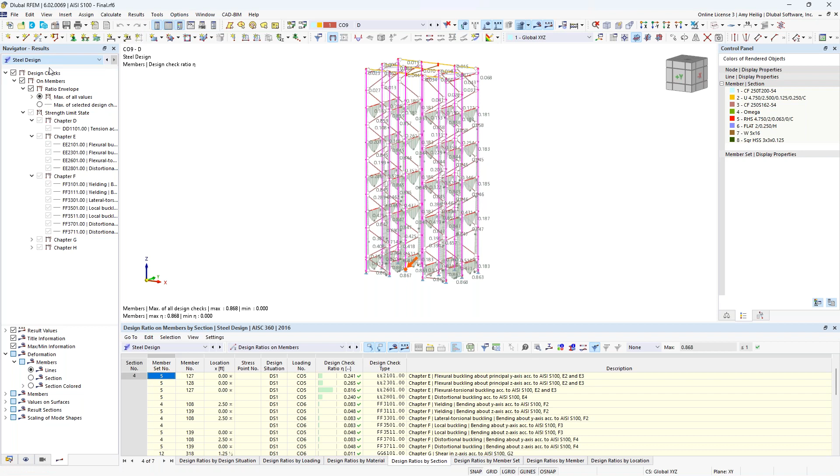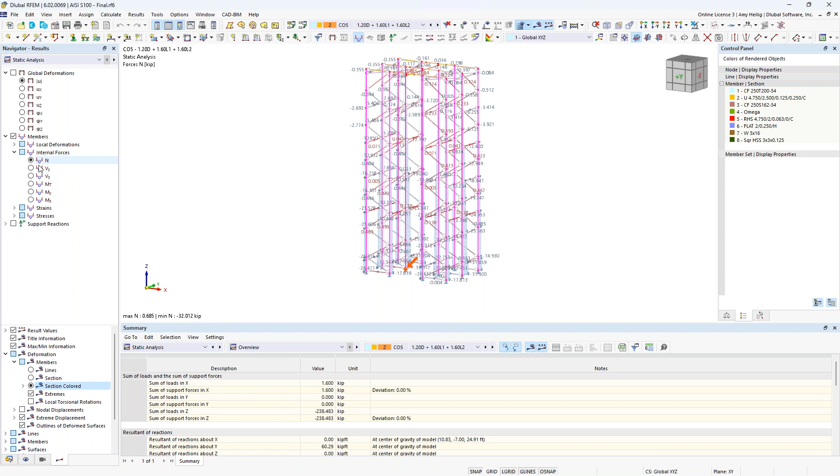So backing up a step, if we also use our drop down here to take a look at the static analysis. So we're currently viewing any one of these load combinations, and this was the static analysis carried out directly within RFEM. So we can view the global deformations, for example, and perhaps I change my deformation display to colored cross sections. We can also view the member internal forces. So we can view the axial forces or the shear forces, bending moments.

If we zoom in here, we can right click on one of these members and access what we call the results diagram. And you can do so with individual members or groups of members. This will allow you to turn on these internal forces or deflections and view in a bit more detail what's going on along the member length.

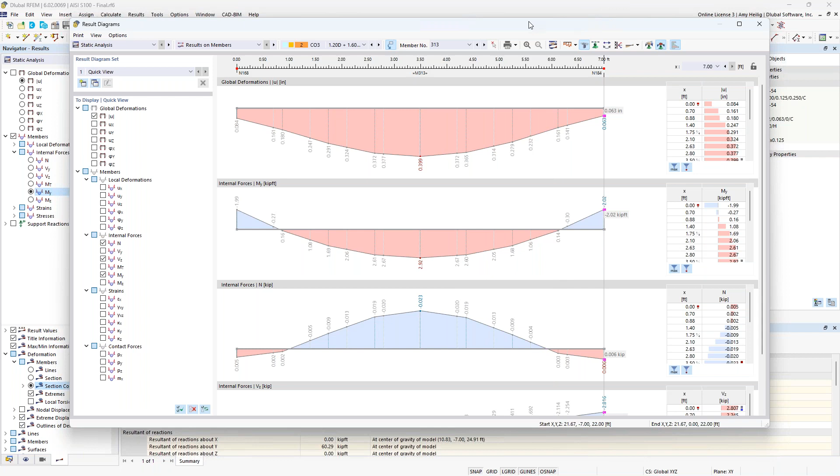We can switch to a different load combination here. We can add this information to the printout report. We can smooth, we can average out these forces. So quite a bit of information here that we otherwise wouldn't be able to do graphically. And you can slide this over to your second monitor and work concurrently in the program.

So in addition to the graphical output, we also have our table output for the static analysis, where we can view the results by member, such as the internal forces. We can export this information to Microsoft Excel with the click of a button up here for further sorting capabilities.

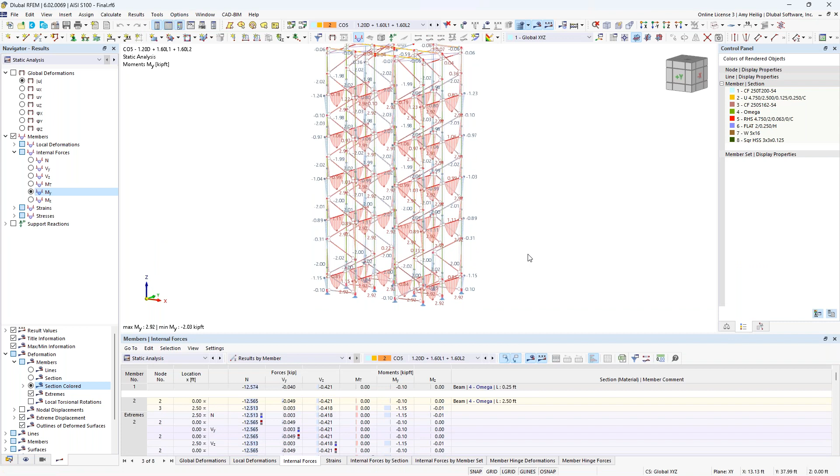So hopefully this just gives us a nice overview then of the full analysis and design workflow for these cold-formed steel sections according to the AISI. As we know, identical workflow for the CSA S136.

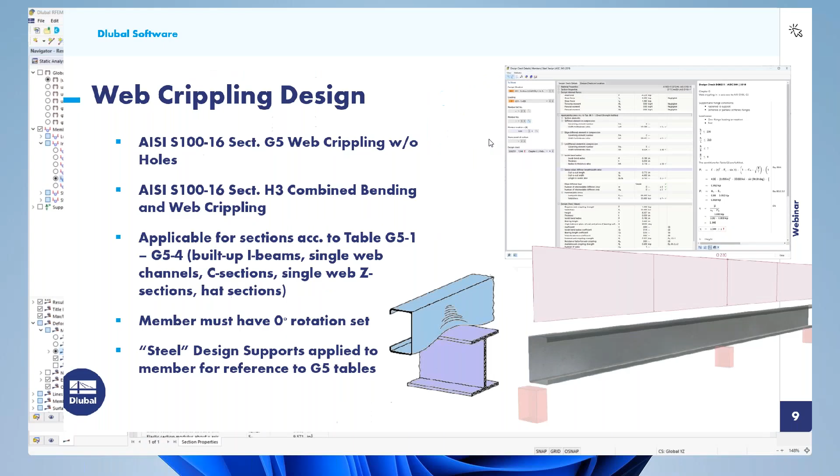So in the final few minutes here, I do want to turn to a topic that is maybe a little bit more unique for an FEA program. And this is web crippling design. So typically in a lot of FEA programs, we just simply can't account for these additional checks. But within RFEM, we actually have integrated these. So we can carry out the design of web crippling according to section G5, and this is web crippling without holes, as well as section H3, which is combined bending and web crippling.

Now, this is only applicable for sections that are referenced directly within the standard, in particular table G5-1 through 4. And those sections are listed here. So any other cross section outside of this list, we won't be able to check web crippling, so you would need to manually take that into consideration. Another requirement is that the member must have 0 rotation set. So we can't rotate this member 90 degrees or 180 degrees. We need to leave it at 0 if we do want to carry out these additional checks.

And finally, the last requirement is that we have to apply what we call the steel design supports. And this will allow us to directly reference these tables from G5 in order to carry out the full web crippling calculations. Now, we've already talked about design supports within our example model today that we use for deflection.

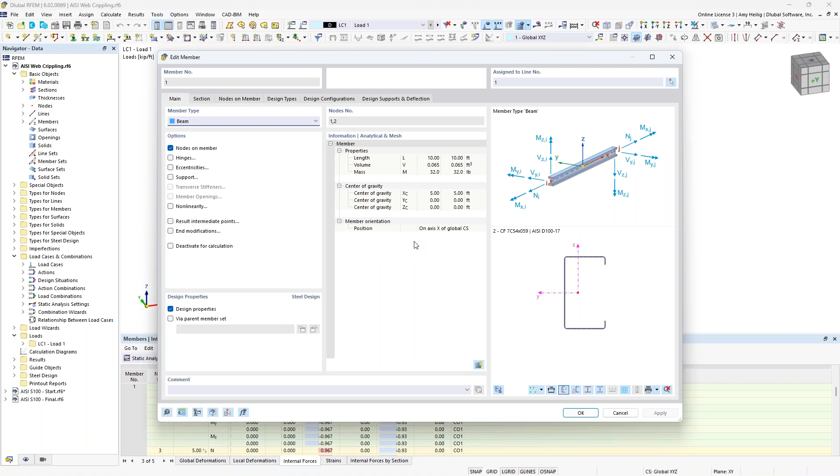Well, if I double click on this member, everything is as we've already learned from our previous example, except for let's take a look at the design supports. So you'll see here that I have already defined supports at the 2 ends as well as the interior with that automatically detected node, but we do need to create the design support definitions.

So you can see the first one, I have labeled this as the end support, and the type in this dropdown is set to steel. If we have this set to general, we'll only consider these design supports for deflection. But when we have it set to steel, this will allow us to further carry out not only the deflection checks, but also the web crippling.

So you'll see that I do need to give it a support width. So we enter in the support width. For my end support, I set this at 3 inches. We need to tell the program if it's an end support, if it has an overhang length, and also is that support fastened to the member. And this information is all important to reference to Chapter G5 from the AISI. Without it, we wouldn't know what variables such as safety factors, resistance factors, coefficients to reference without directly inputting it in here.

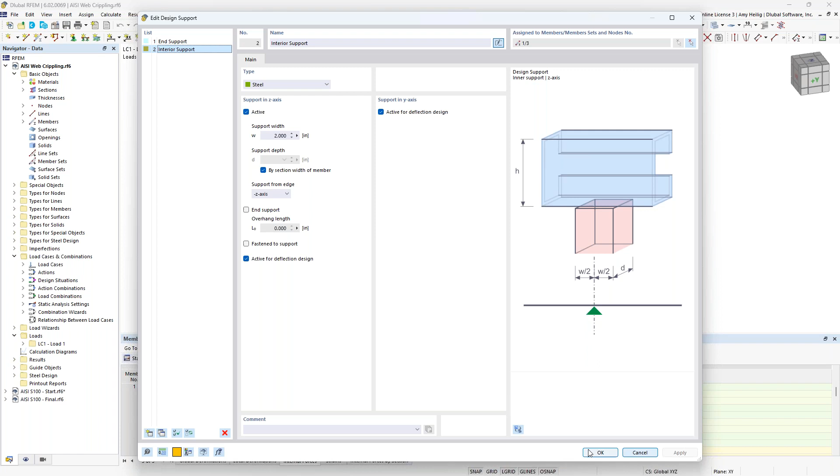Now I also have a second definition for my interior support. So if these supports vary, that's no problem. We just create a second definition type here. The type is set to steel. My support width was decreased to 2 inches. It's not an end support, and maybe it's not fastened to the member. So once we have the definition set, then we just simply use our drop-down box to assign them to the nodes along the length of the member.

So once this is input, we can take a look here at our steel design results. And you can see that my design ratios here, except for these ones shown in red, are very low. We have 0.304 or lower for this particular cross-section design according to the AISI. These two checks that are over the 1.0 ratio are specific to web crippling.

So you can see how maybe perhaps if we forgot to carry this out, the member looks like it's passing quite well. But when we add in these additional web crippling checks, we see that actually the member is not adequate. Again, web crippling according to G5, as well as combined bending and web crippling according to H3.

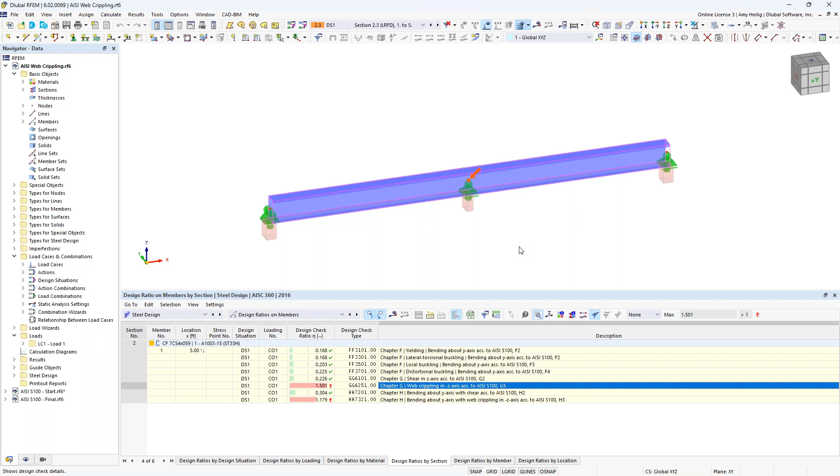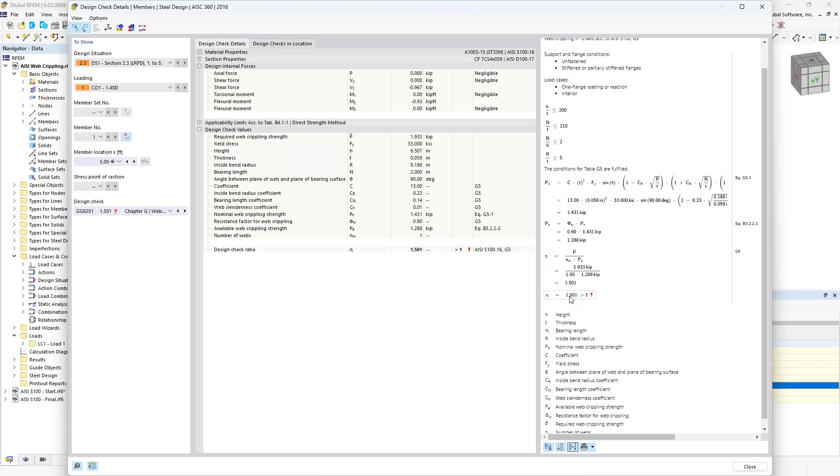We can pull open the design check details here, and we can see all of the information where we will reference those tables in G5. We list them out here in table format as well, and ultimately how we're calculating that design ratio for web crippling. So just an added benefit here of RFEM, again, that many FEA programs can't consider, but because we have those specific steel design supports, we can carry out this additional check.